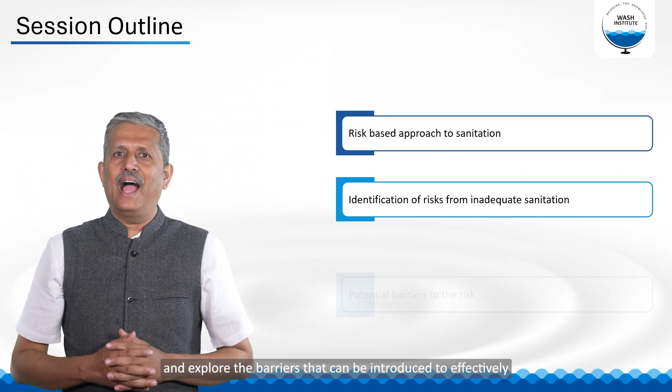In this session, we will learn about the risk-based approach to planning for town sanitation, understand the process of identifying potential risk, and explore the barriers that can be introduced to effectively address those identified risks.

Let us first look at what the objectives of sanitation should be. The primary and core purpose of sanitation is to improve public health by reducing the prevalence of sanitation-related diseases through better waste management and hygiene practices.

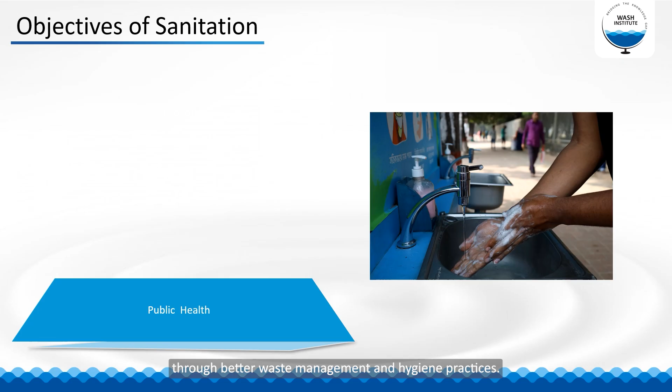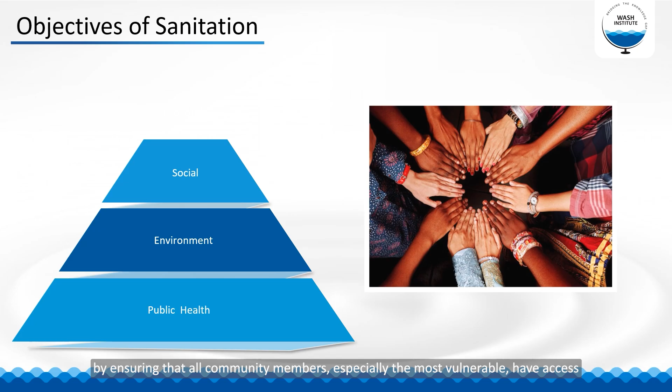It also seeks to ensure environmental sustainability by promoting eco-friendly sanitation solutions that minimize environmental impact. Additionally, sanitation aims to enhance social equity by ensuring that all community members, especially the most vulnerable, have access to adequate sanitation facilities. Finally, it promotes economic benefits by reducing healthcare costs and improving productivity through a healthier population.

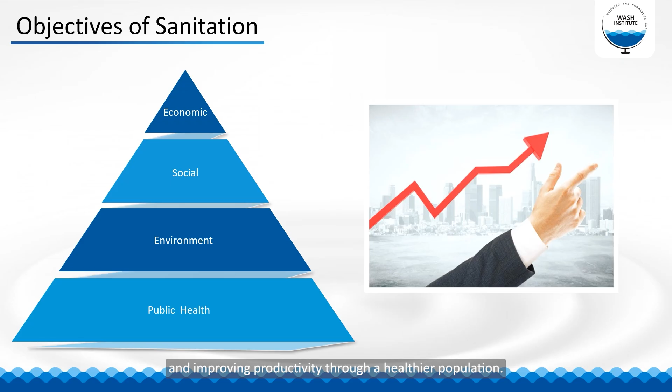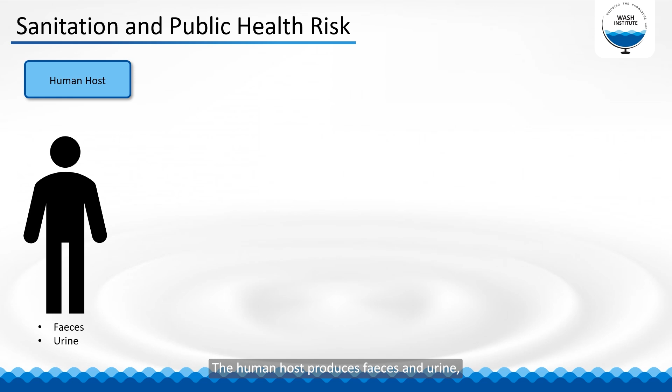Insufficient and ineffective sanitation systems or hazards at any stage enable the spread of disease-causing pathogens. The human host produces feces and urine, also known as excreta. This excreta finds its way through a toilet to various stages of the sanitation chain like containment, conveyance or transportation, treatment, disposal or reuse. Unsafe handling of excreta at any of these stages can lead to a sanitation hazard.

Pathogen transmission is possible through means like flies, animals, water bodies, fields or groundwater, and this possible transmission is known as a hazardous event. These pathogens can be exposed back to human beings through crops, drinking water, hands or fingers, feet or skin, and objects or surfaces. Once humans are exposed to pathogens, they enter the body through face, mouth, and feet, resulting in diseases.

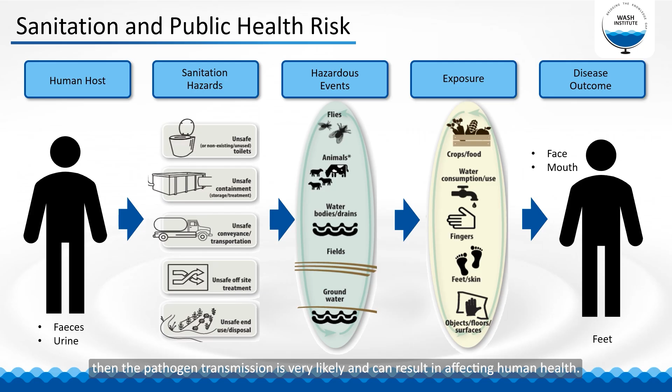For example, if a household is connected to an unsafe containment system like a pit latrine in a high groundwater table area, and households source drinking water from open wells nearby, then pathogen transmission is very likely and can result in affecting human health.

Risk is a product of exposure and hazardous events. Frequent exposure increases the risk. For example, if a household does not have a containment system and disposes its toilet waste in a pond, and then uses the same water for drinking, the risk is considered very high.

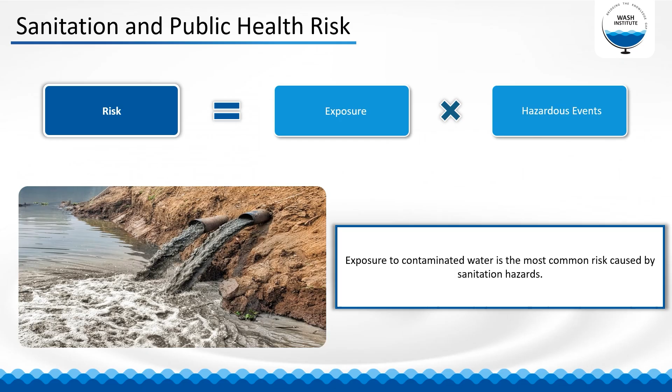To address this risk, we need a structured approach. A risk-based approach is an approach suggested by WHO that helps improve public health by assessing the risk and building barriers to pathways where the used water may impact public health.

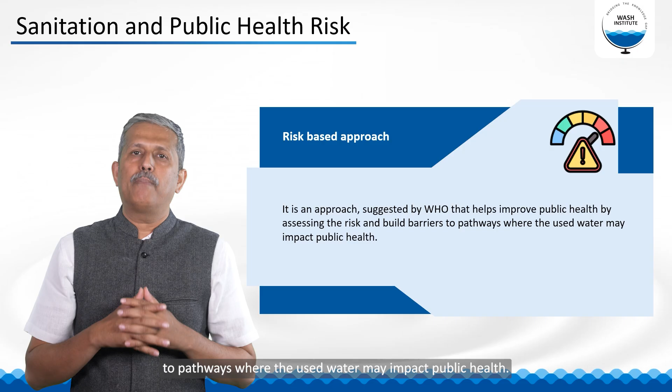To effectively manage the risk, let us go through the steps involved in the risk-based approach. The initial step involves identifying all potential paths in the town that pose risk to public health.

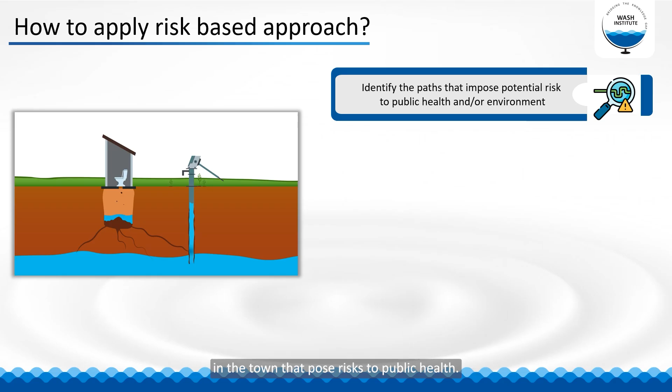Next is to quantify the exposure, such as determining how many households are dependent on a particular system in a ward. Then categorize the risk as low, medium, or high. Finally, determine the barriers or solutions that should be implemented to address the risk in the identified paths.

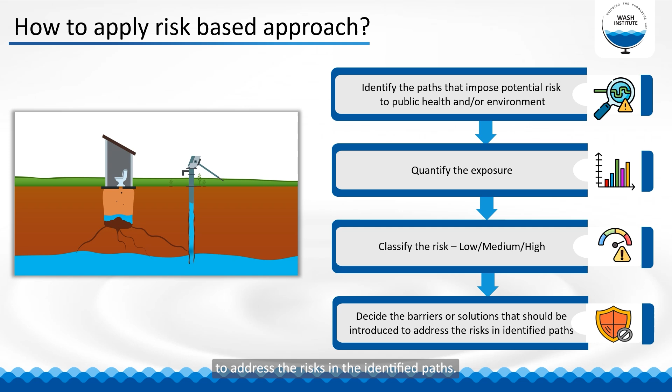Let's explore the various risk categories to gain a better understanding. For instance, if the majority of households in a ward use pit latrines and depend on shallow groundwater sources like open wells or hand pumps for drinking water, this would be designated as high risk.

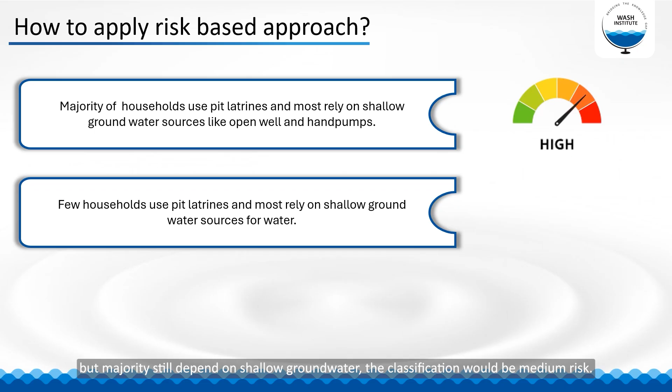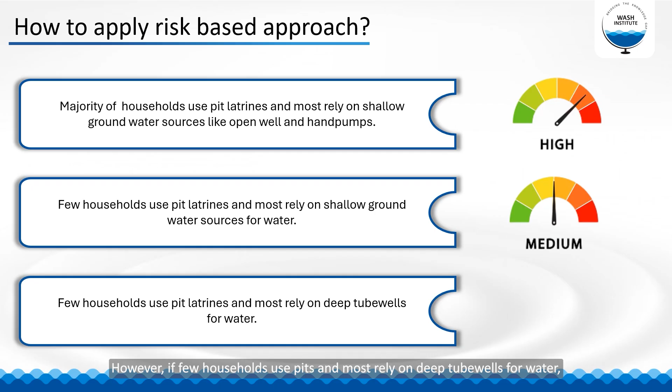If only a few residents use pit latrines but the majority still depend on shallow groundwater, the classification would be medium risk. However, if few households use pits and most rely on deep tube wells for water, it would be labeled as low risk.

Let us move ahead to learn more about possible scenarios, transmission paths, and the appropriate barriers to mitigate the respective risks. Firstly, let us map possible sources of water based on the household survey and interview with the local authority. They can be broadly classified into three categories: surface water bodies such as rivers or lakes, groundwater from shallow aquifers, and groundwater from deeper aquifers.

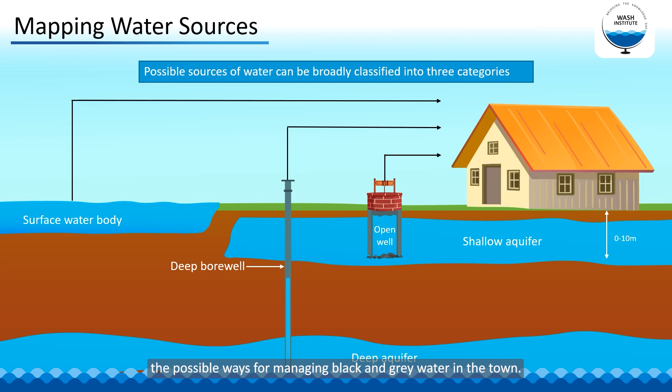Next, let's examine the possible ways for managing black and grey water in the town. Generally, used water can be either infiltrated into the ground or directed to a specific area.

The black water can be managed through a septic tank, where the effluent can be managed through a soak pit or conveyed to a disposal site through an open or closed drain. Alternatively, it can be managed through a pit latrine or twin pit latrine. Another way is through a sewer network.

Along with the black water, grey water is conveyed to a designated area. The grey water can be managed by conveying it to a designated area through open or closed drains, sometimes along with septic tank effluent, or by infiltrating it into the ground through a kitchen garden or soakaway.

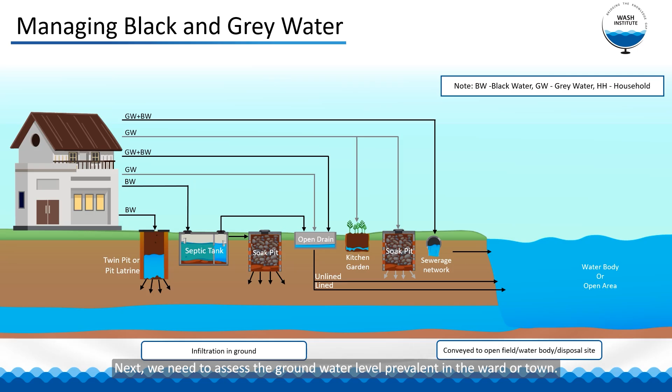Next, we need to assess the groundwater level prevalent in the ward or town. Different soils have different resistance to the flow of water through them before reaching groundwater. This resistance helps in curbing and containing the pollution from directly reaching the water body.

Various research indicates a safe distance between 3 to 6 meters from the bottom of the pit to such sources. So we will consider a depth of 10 meters below ground level to be a safe distance that helps in significantly preventing any groundwater contamination from discharge of used water in the soil.

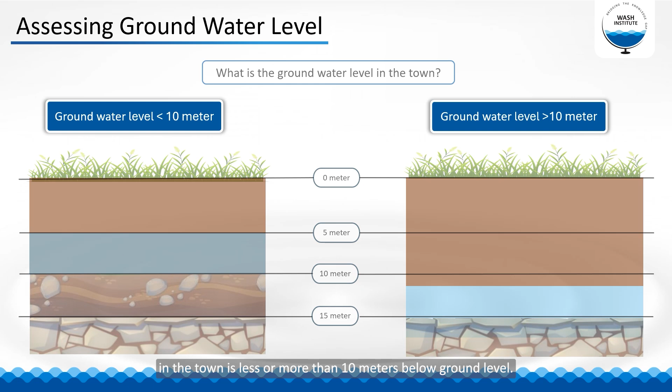Hence, as a next step, we determine whether the groundwater level in the town is less or more than 10 meters below ground level. In both scenarios, it is essential to identify possible pathways that could lead to health hazards, as this will help in identifying and prioritizing the necessary interventions. We will examine each scenario individually.

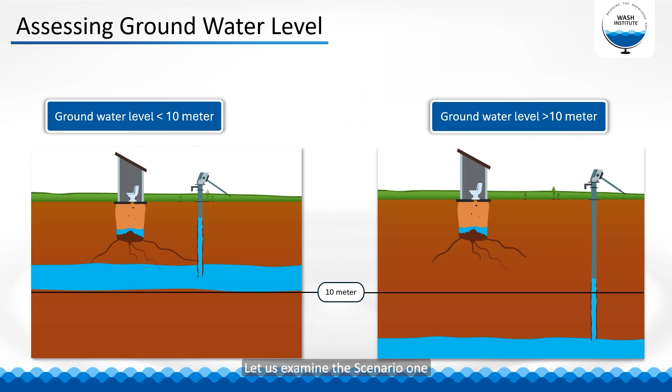Let us examine scenario 1, where the groundwater table is 0 to 10 meters below ground level. Sanitation systems that infiltrate into the ground, such as twin pit or pit latrines, and soak pits attached to septic tanks,

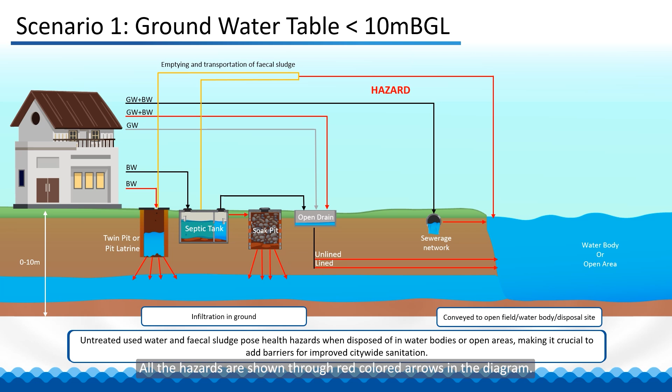and unlined open drains, can pollute groundwater and pose a health hazard. Additionally, if untreated used water and fecal sludge are disposed into water bodies or open areas, they can also pose a health hazard. Therefore, it is important to add barriers in all these pathways to improve citywide sanitation. All the hazards are shown through red-colored arrows in the diagram.

If the groundwater table is high, there is a risk of pollution of shallow aquifers through various kinds of infiltration of used water. Discharging untreated used water into the water body also poses a risk of surface water pollution. Therefore, drawing untreated water from open wells, shallow aquifers, or surface water bodies for drinking purposes can pose a health hazard.

We need to implement effective used water management practices to prevent health hazards from groundwater and surface water pollution. Here are the key steps. First, we need to ensure that all sanitation systems that release water into the ground are avoided.

Next, all used water connected to the sewerage network should be sent to sewage treatment plants for proper treatment before its disposal or reuse. Regular desludging of septic tanks is mandatory, and all fecal sludge should be transported and treated at a fecal sludge treatment plant or co-treated at the sewerage treatment facilities.

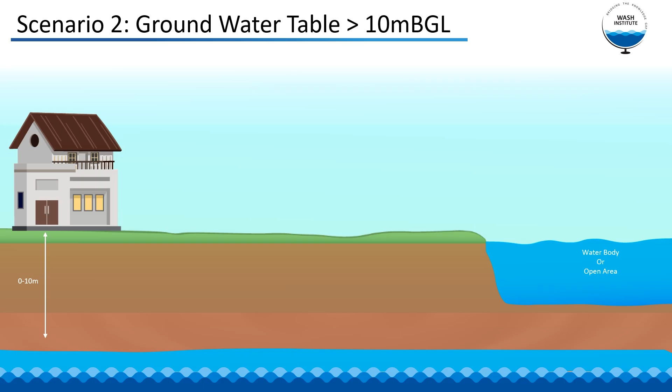Now consider scenario 2, where the groundwater table is more than 10 meters below ground level. The disposal of untreated used water and fecal sludge into water bodies or open spaces presents a significant health risk, and therefore it is essential to implement barriers in all these pathways to improve citywide sanitation.

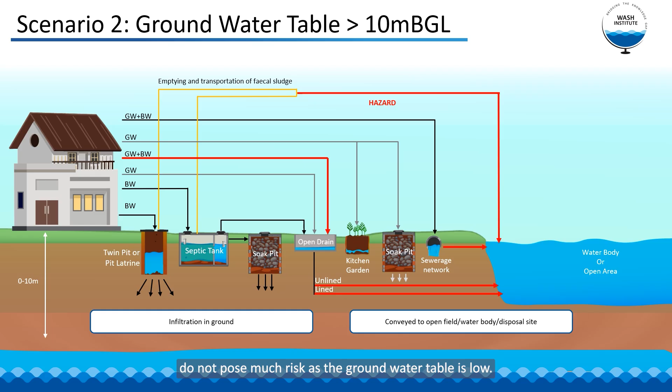While systems infiltrating into the ground do not pose much risk, as the groundwater table is low, the chances of pollution through infiltrating systems are reduced. However, surface water may be contaminated, so using it for drinking purposes may pose a health hazard.

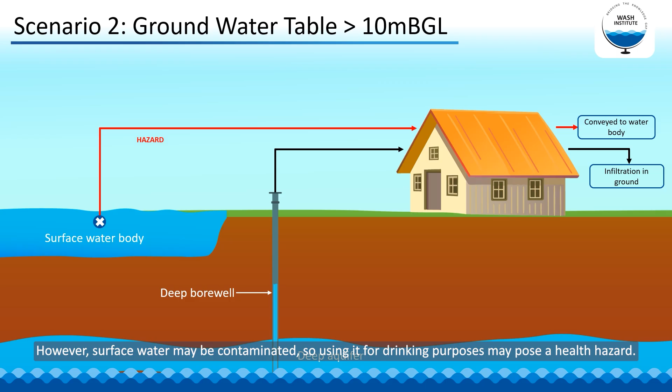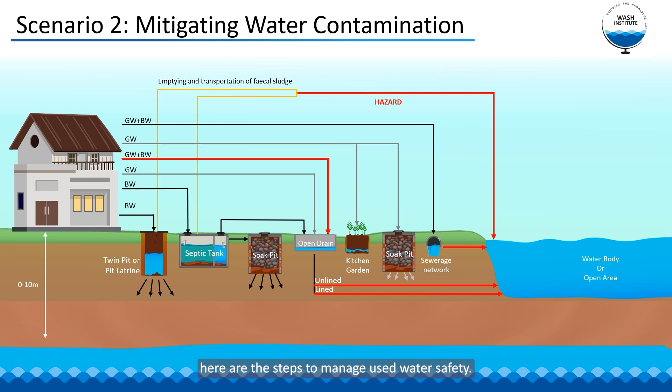To mitigate the risk associated with both low groundwater table and surface water contamination, here are the steps to manage used water safety. First and foremost, it is essential to ensure that all the toilets are either connected to on-site systems or sewerage network, so that no black water is discharged directly into the environment.

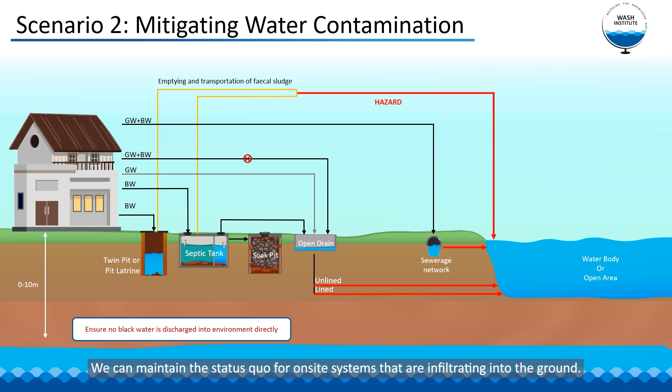We can maintain the status quo for on-site systems that are infiltrating into the ground. Next, all the used water connected to the sewerage network must be directed to sewage treatment plants for proper treatment before it is disposed of or reused.

It is important to enforce regular desludging of septic tanks. The fecal sludge should be transported and treated at a fecal sludge treatment plant or co-treated at the sewage treatment facility. Furthermore, all the used water flowing in the drains should be intercepted and diverted to the sewage treatment plant.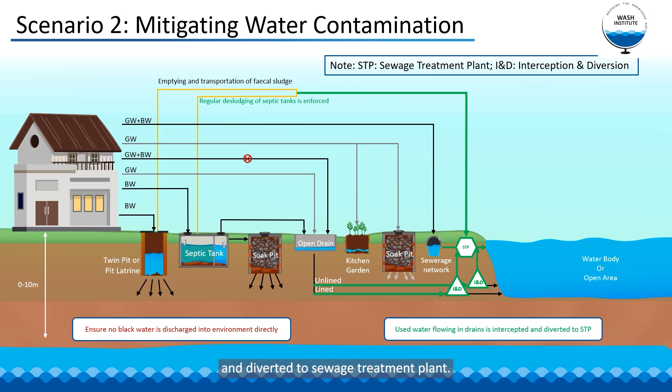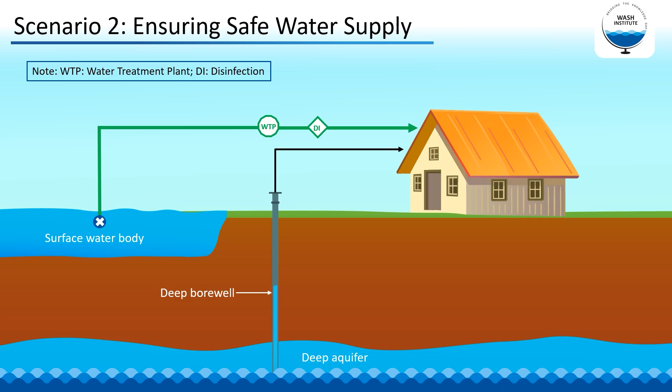To address potential hazards in the water supply, we can include barriers of water treatment plants and disinfection units. We can also introduce disinfection units at a household level.

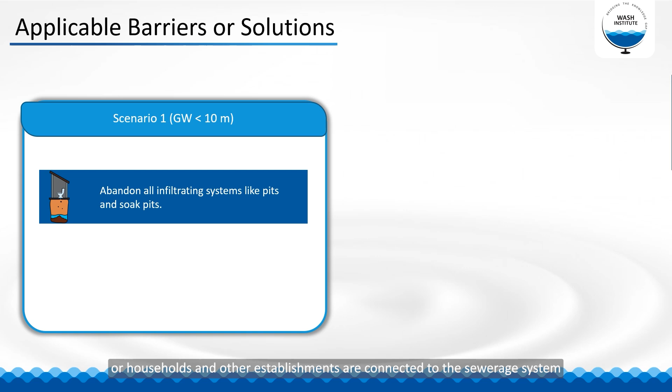Let us summarize all the barriers that should be implemented in each scenario. When the groundwater table is high, abandon all infiltrating systems by either ensuring that the outlet of septic tanks is connected to lined drains, or households and other establishments are connected to the sewerage system, and convert all the unlined drains to lined drains. Strengthen piped water supply of treated water.

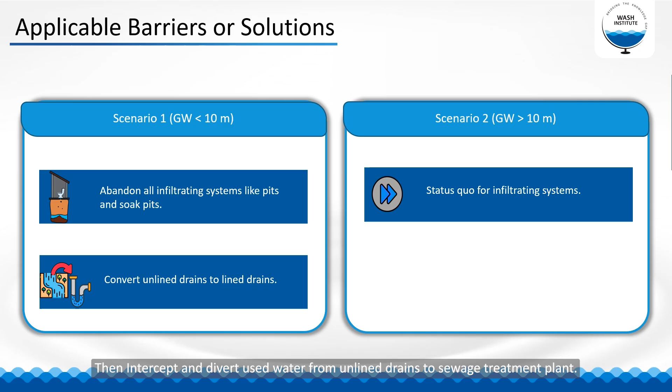But when the groundwater table is low, maintain the status quo for infiltrating systems like pits, soak pits, and unlined drains, but ensure their proper maintenance. Then intercept and divert used water from unlined drains to the sewage treatment plant.

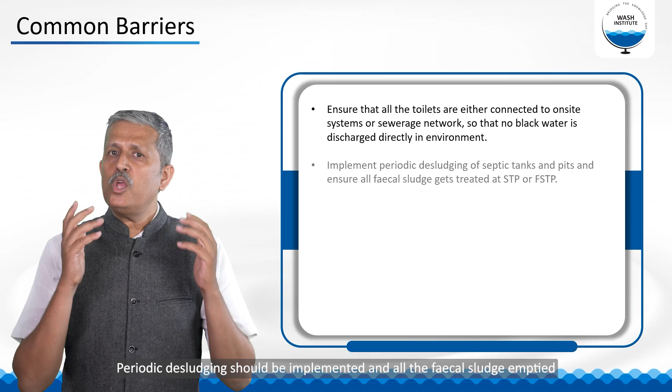However, there are certain common barriers for both scenarios, such as ensuring all toilets are connected to either on-site systems or sewerage network, so that no black water is discharged directly into the environment. Periodic desludging should be implemented, and all the fecal sludge emptied should be co-treated at the sewage treatment facility or treated at a fecal sludge treatment plant.

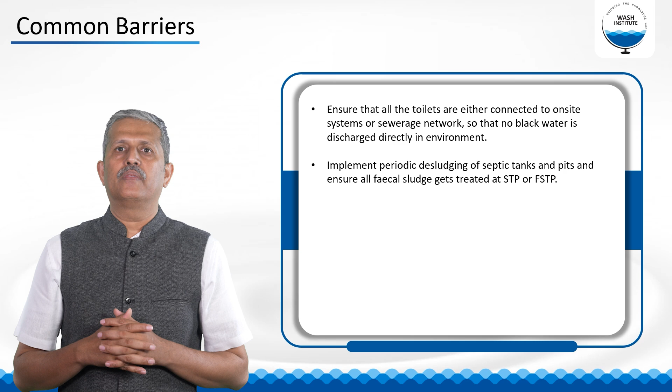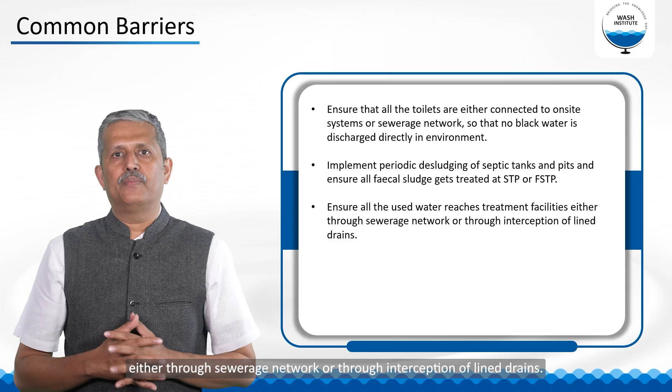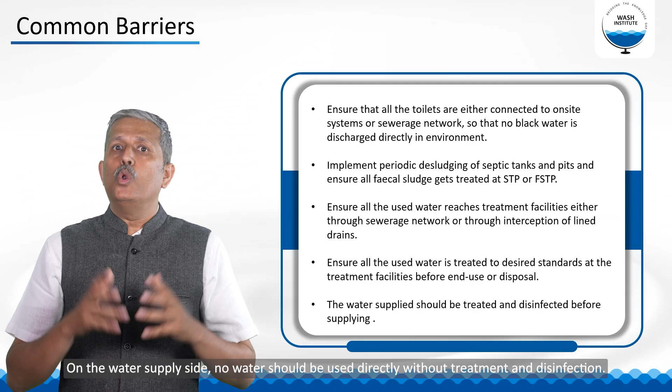It is important to ensure that all used water is conveyed to the treatment facility either through the sewerage network or through interception of lined drains. Ensure that all used water gets treated to the desired standards at the treatment facilities before its end use or disposal. On the water supply side, no water should be used directly without treatment and disinfection.

Before we conclude, let's summarize the key takeaways from this session. The core objective of sanitation is public health, followed by environmental protection. Disease-causing pathogens can be transmitted to humans through various pathways due to inadequate and inefficient sanitation systems at any stage of the sanitation chain. One of the main sanitation risks is the contamination of drinkable water through these pathways.

The level of risk depends on exposure to sanitation hazards. Higher the exposure, higher the risk. Using a risk-based approach can help in selecting the appropriate barriers or solutions to address the sanitation hazard. Thank you for going through this session.